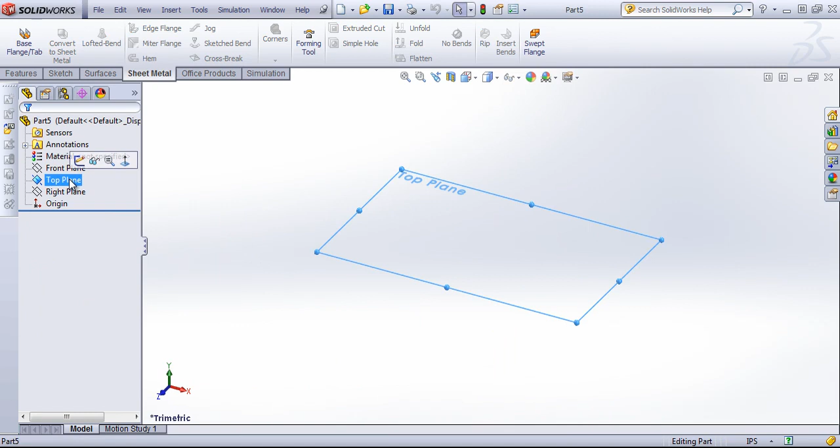A helix is relatively simple to create with the sheet metal features using a lofted bend. All we need is two sketches to set up the two profiles. So I'll go ahead and create a new part, and I'm going to draw two circles out on the top plane. And I'll go ahead and give these two dimensions, and put them in separate sketches.

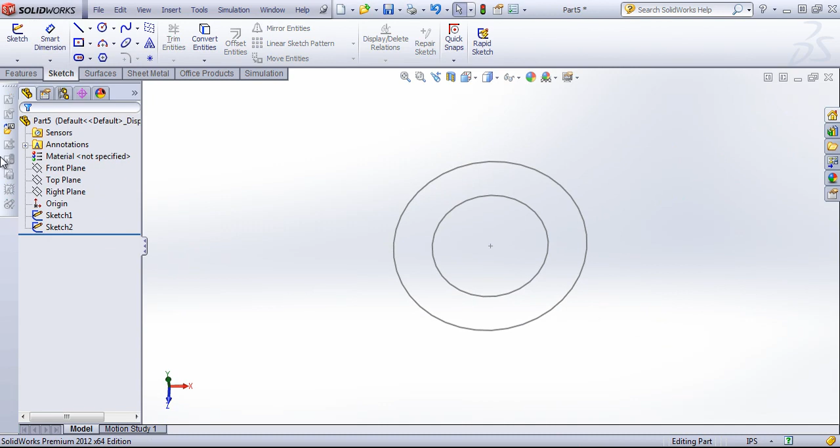And then I'm going to come into curves and create a helix from each one. And for the lofted bends, typically you'll only be able to use one revolution for the helix, as the flat pattern will generally overlap itself if you make this too much above 1. So 1.25, 1.5 sometimes works. Usually you want to stick to one revolution. In this case, I'm going to stick with the pitch of 3 inches. And I'll do the same here.

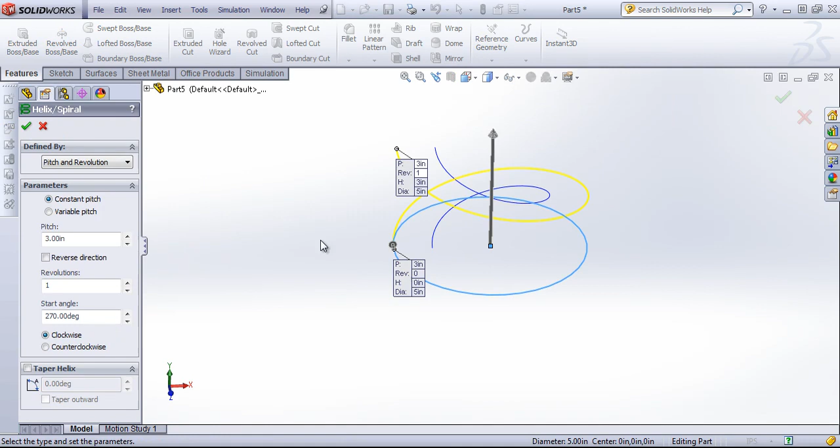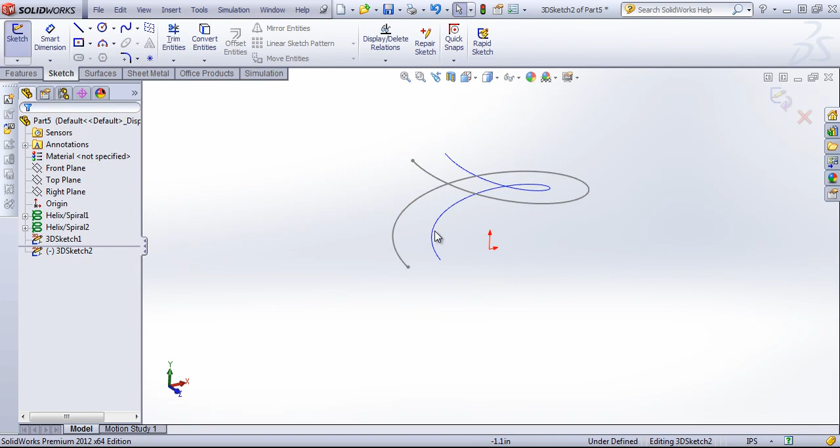Next, we can create a 3D sketch and convert over one of the helixes. And then we can create another 3D sketch for the second profile. Now all we have to do is come into lofted bend, select out the two profiles, choose the thickness, and click OK. And then when we go to flatten the part, it should create the flat pattern.

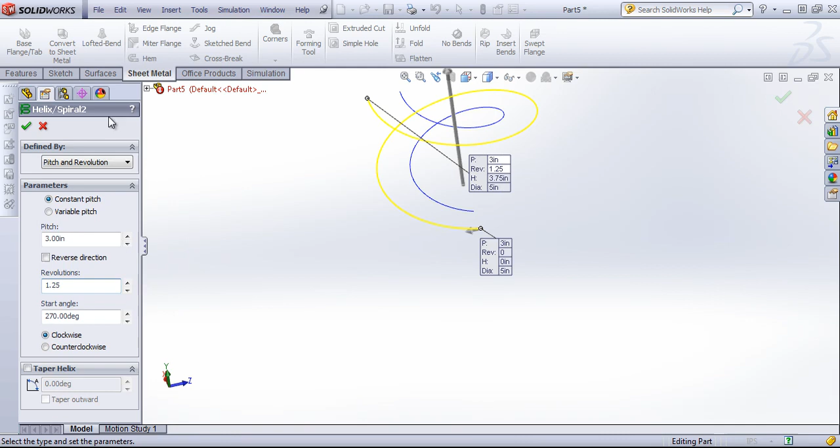Now you'll notice that if I have more than one turn, these are most likely going to overlap, and that'll cause the flat pattern to fail. So if I go ahead and modify these both, you'll see that the flat pattern fails, as this would self-intersect. So I'll go ahead and keep these at 1.

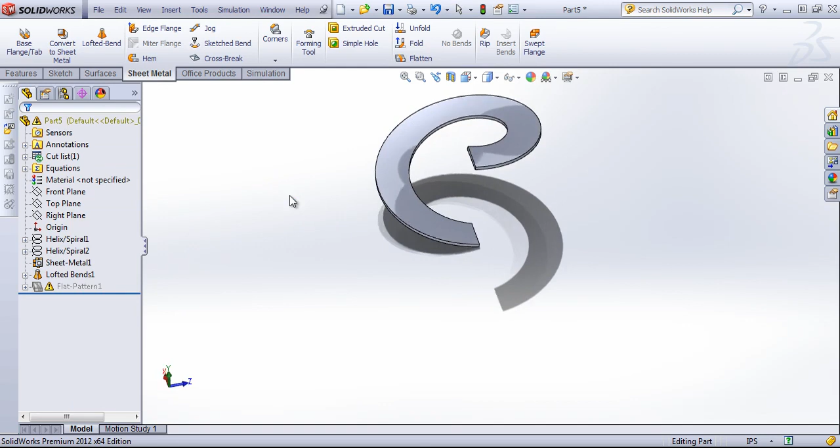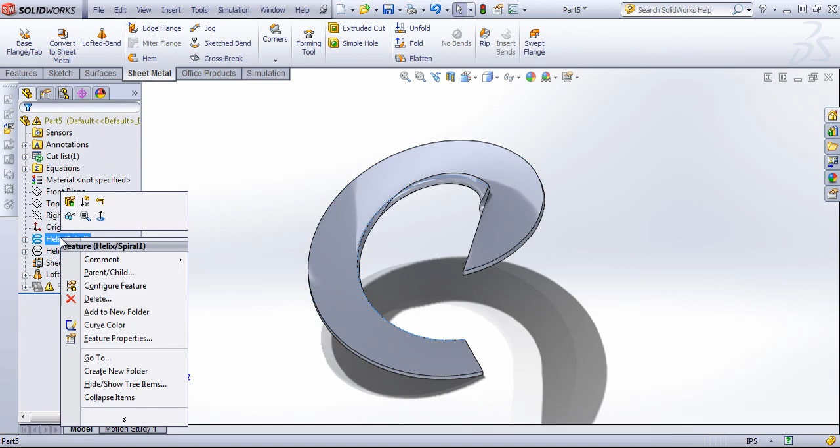And you can vary the dimensions between the helixes. And this feature generally should be able to complete. You will have to play around with it a bit. In this case, that change in the number of revolutions doesn't quite work for this. I'll go ahead and change the pitch slightly. And now you'll notice that it's no longer as straight of a loft. And that'll still flatten.

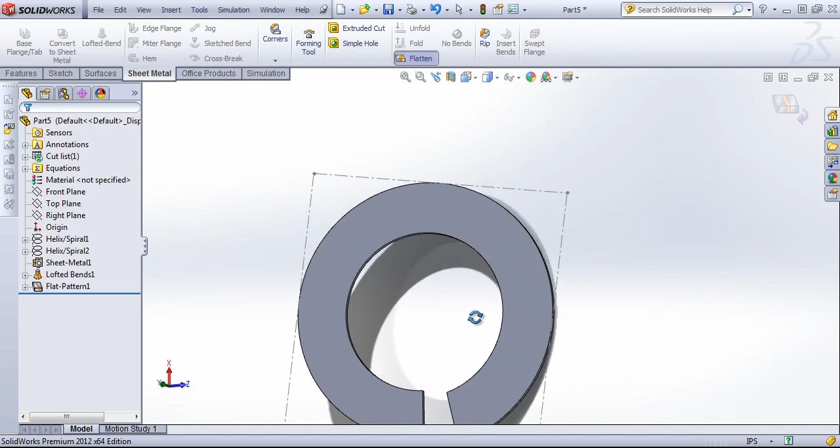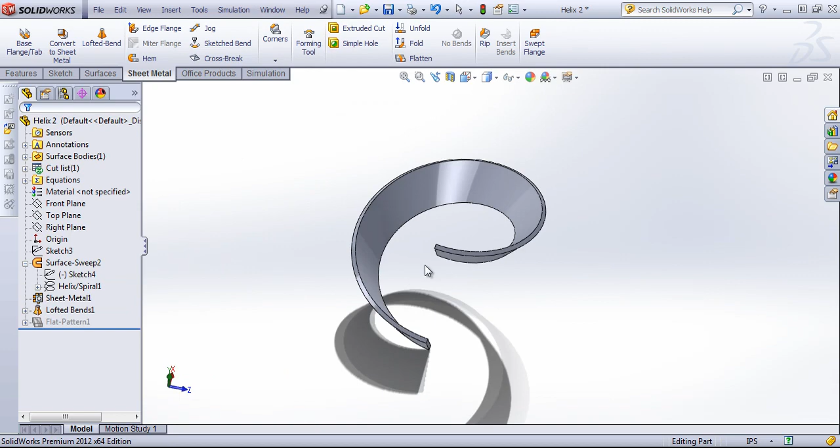There's a few other ways to create a helix as well. Instead of creating two of these helixes, we could have swept a surface up and converted over the two edges. So in this case of this helix, we have this surface that was swept from this sketch and this helix. And you'll also notice that this isn't normal to the plane that this is on. So you can also vary the geometry quite a bit using this swept surface option.

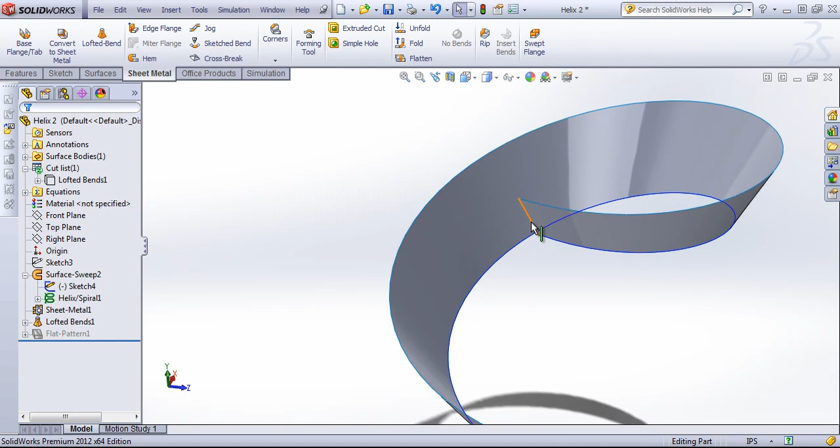And then you'll see two 3D sketches on either edge. And those two 3D sketches are selected to create the lofted bends.

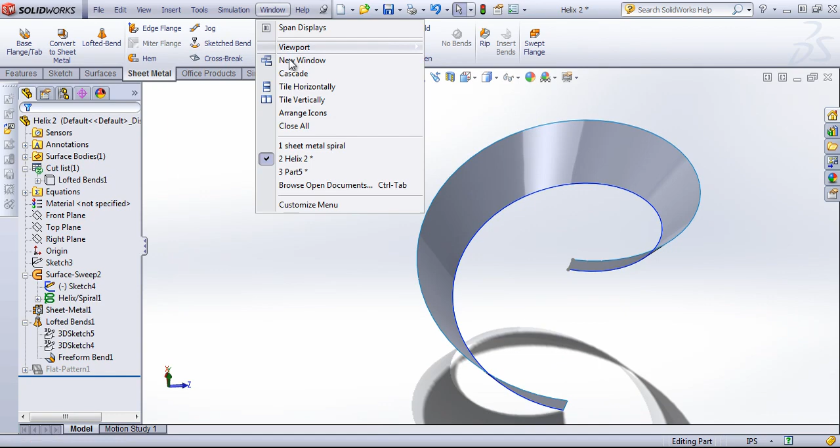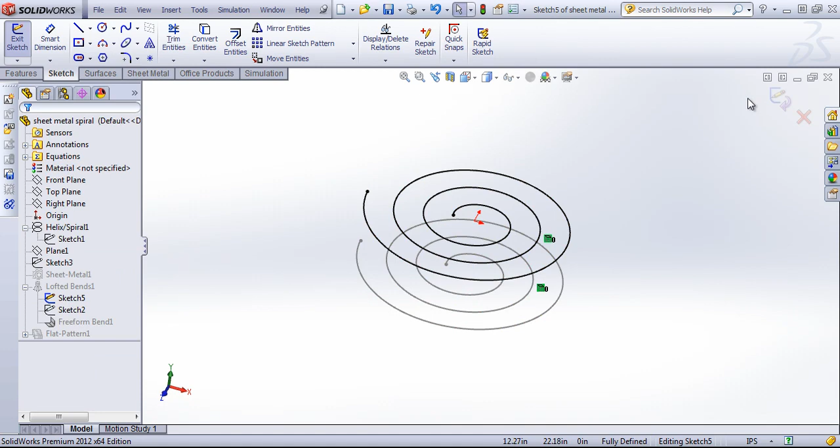Lastly, you can also create a spiral with the Helix feature. And then simply convert over that sketch to a new plane, and then use the two to create a lofted helix or lofted spiral. But that's how you create helixes and spirals using the lofted bends tool.